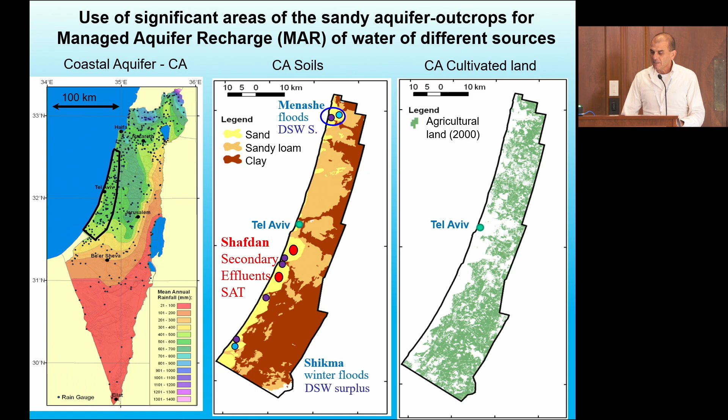Back in the 1960s, it was a waste - the runoff ran very fast to the Mediterranean, and we lost the water from the freshwater storage. Therefore, our clever hydrogeologists back in the 1950s-60s put a dam in a 16-kilometer channel and moved the water to the sands, where it percolates to a good aquifer, and we can store it and use it then.

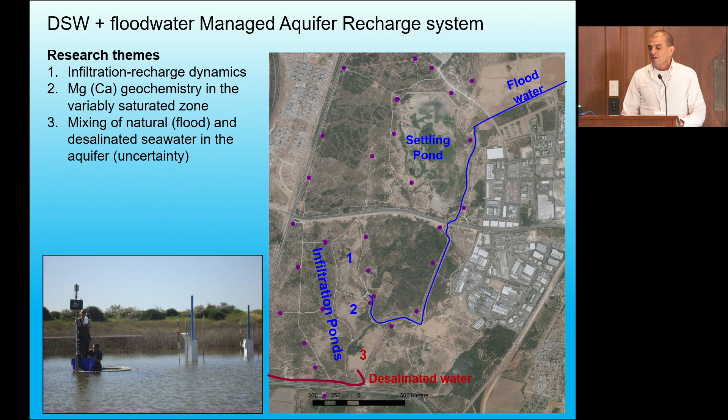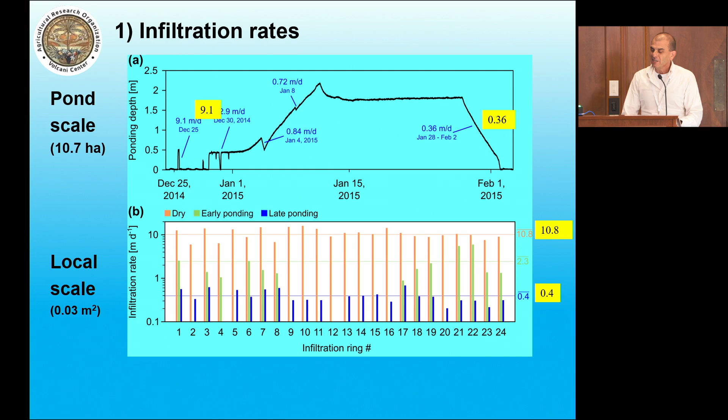We also tried to look at spatial variability, so we had 24 single ring infiltrometers, and luckily the results were pretty much the same. The infiltration rate to the dry pond at the beginning was in the area of 10 meters per day, whereas after a few weeks of ponding it went down to 0.4 meters per day. We usually speak about clogging in these infiltration ponds, but for this high quality, very low turbidity water, that's probably not the case, and we didn't see any evidence for clogging.

What we did find, when we tested the sediment structure, is that these are sandy infiltration ponds, but they also have clay beds down between 4 to 6 meters, as you can see here, whose permeability is much lower. So if you calculate the effective hydraulic conductivity, or saturated hydraulic conductivity, by this harmonic mean, you get rates close to the rates I showed before that we measured. If you assume a unit gradient and Darcy's law, you can easily estimate it, knowing the sediment and having good samples of the sediment.

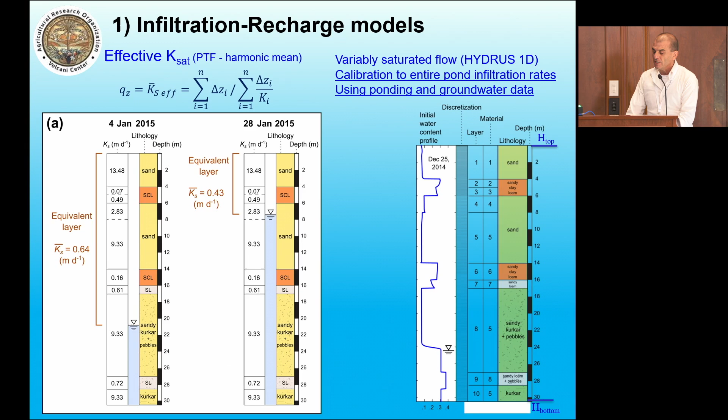To summarize this part: the infiltration rate decreased from 10 to about 0.4 within days of infiltration. Is it surface clogging? No. It's the low permeability layers of the unsaturated zone, and we can estimate the final infiltration rate from the sediment samples. We calibrated a model that will be used in the next chapters. This was published in 2017 in Hydrology and Earth System Sciences.

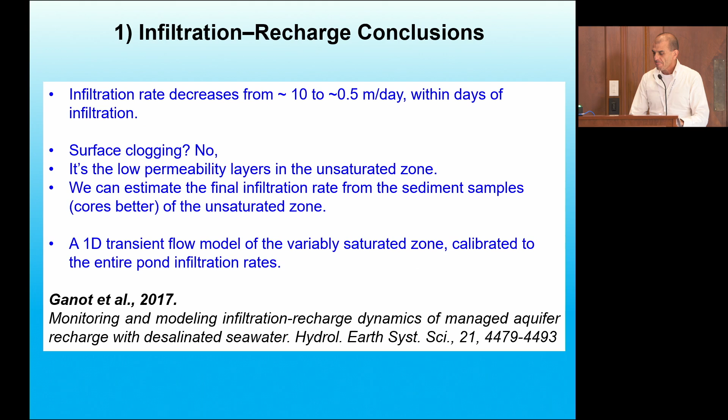So the next thing I'll talk about is the geochemical evolution of the recharging water. When we look at the geochemistry of the system, I'll first look at the sediment, and then I'll talk about the water. On the left you can see the sediment profile. We tested two geochemical aspects.

First, the carbonate content. You can see we have some carbonate in the top sand, and then in the lower sand it goes down - the carbonate is flushed. Deeper, at about 16 meters depth, we get to the calcareous sandstone we call kurkar, which has a high percentage of carbonate.

The gray profile is of the exchangeable cations, the cation exchange capacity of the sediment. The two major exchangeable cations are calcium and magnesium. For most of the profile, exchangeable calcium is about an order of magnitude higher than exchangeable magnesium. So this is for the sediment.

For the water, we divide it into three types here. First, the desalinated water - we call it post-treated desalinated water, meaning the desalinated water is post-treated by dissolving limestone into it. So the major cation is calcium, and the major anion is bicarbonate. Magnesium, as said before, is practically zero - not zero, of course, there's no zero in chemistry, but it's about 0.1 to 0.2 milligrams per liter magnesium.

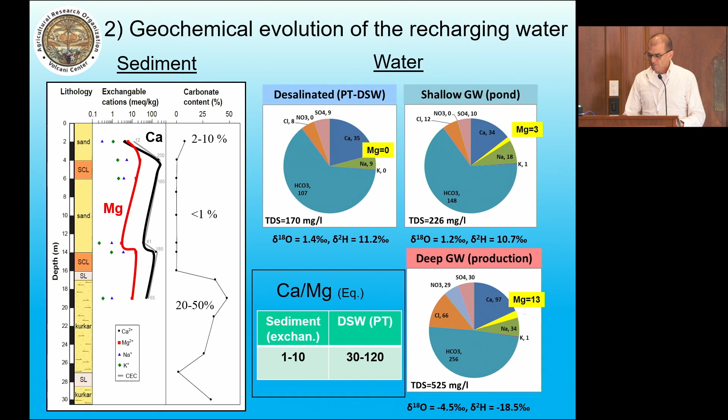Therefore, the direction of the ion exchange will be: calcium goes from the water into the sediment, whereas magnesium desorbs from the sediment into the water. So this is the process we have here.

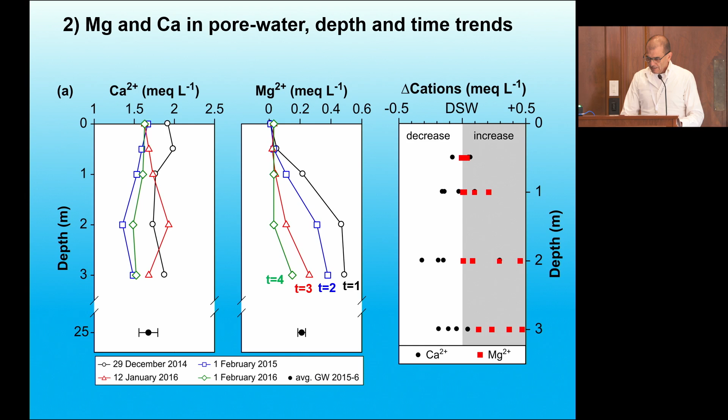If we look at the central panel, this is the top 3 meters results from suction cups we used, where T1 is the first profile and T4 is the latest profile, about a year and a half between them. We see the magnesium is like an ion exchanger - the top 2 meters were exhausted in these 2 years of infiltration of desalinated water. Remember this trend for the next slide.

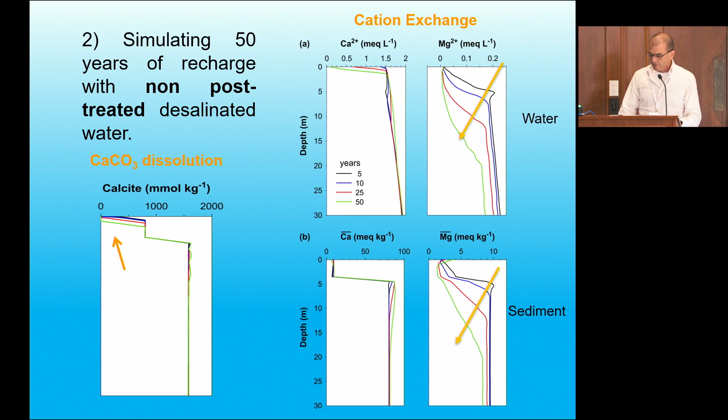So if I summarize these parts: enrichment of non-post-treated desalinated water with calcium and bicarbonate is possible through infiltration. It's cheaper, mostly environmentally, than industrial treatment in a plant, and sustainable for centuries. But the addition of 2 to 3 milligrams per liter magnesium through cation exchange will occur also with non-post-treated calcium. First the calcite will be dissolved and the exchange will happen deeper in the profile. Nevertheless, exchangeable magnesium will be depleted within decades. This was also published in Water Resources Research in 2018.

Now I jumped with calcium and magnesium to another site, the Shafdan, a more famous site. It works already more than 40 years in some parts of it, and it's much more intensive. In the site I showed before, we have about a column of 20 meters of water percolating per year through the infiltration pond. In the Shafdan, which has much more infiltration ponds, it's about 120 meters column of water.

So the history of water supply in Israel is kind of divided before desalination and after desalination. Let's look at the inflow to the Shafdan system before desalination. The calcium level on average was 70 milligrams per liter, whereas after the soil aquifer treatment, the sediment added 30 milligrams per liter.

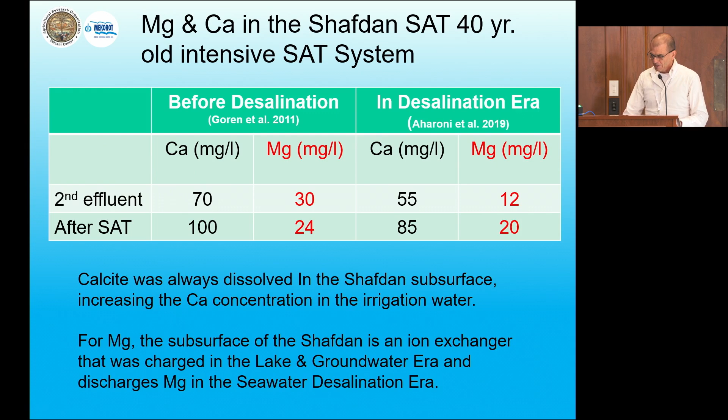So the farmers that use the Shafdan water are happy with that. The magnesium level didn't change dramatically, and it's certainly enough magnesium. They don't have to add magnesium by fertilization. This is an aspect of the Shafdan soil aquifer treatment that we're lucky with, but it works pretty good for us. We charged it as an ion exchanger before the desalination era, and we are now getting the magnesium back in the desalination era.

Now I go back to the site at Menashe, and in the third part of the lecture, I'll try to estimate the mixing of natural and desalinated seawater in the aquifer using stable isotopes. So I remind you the desalinated water goes to pond number 3, the southern pond, while the floodwater goes into the northern ponds 1 and 2.

At the lower left panel, you can see in the bars the amount of water, in the left-hand vertical axis, that was recharged. In red, the desalinated water for the 8 years between 2015 and 2022, and in blue, the runoff water. So as you can see, until 2018, we were in drought. There was very little runoff water, whereas after 2018, we have rainy years, and you see more of the blue bars. This is a monthly discharge. Usually, like in 2017 and 2016, it was only in January, and in 2019, this operation was January, February, March.

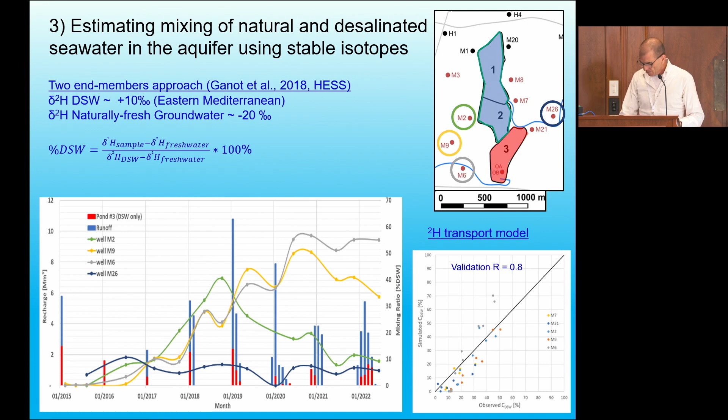So we wanted to investigate how we can predict that percentage, like for knowing how much magnesium—let's say we assume it's non-reactive, so the mix will give us the concentration of magnesium. It's not exactly non-reactive, but in the aquifer it's closely non-reactive. The aquifer adds a little, not like in the unsaturated zone that I showed before.

So every problem like this, when we want to predict, we have some uncertainty, and we have here two types of uncertainty. First, we're dealing with the subsurface—we don't know the aquifer. How is the aquifer composed? We only know it from the wells we drill, but the wells represent a very small volume of the aquifer. So we need to interpolate the type of rock, the hydraulic properties of the rock.

And we can do that using what we do in stochastic hydrology. We can make many realizations of the aquifer and run flow and transport models through these realizations and see the results. The second source of uncertainty is climatic, as you see it's very variable—the amount of water available through the ephemeral flows.

So we could also fit the histogram—actually the same histogram, but now in larger bins here—and we can fit a probability density function. This is a gamma probability, and we make many realizations of the future available water through the runoff system.

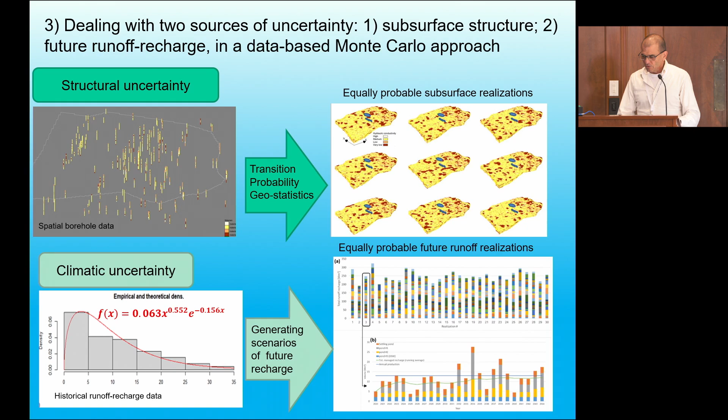And so we wanted to predict here. Just a minute, okay. So we handled these numerical experiments. We had 4 ensembles of 30 realizations each. I'll concentrate only on two, the green ensemble and the blue ensemble. In the green ensemble, we put 30 realizations of the aquifer. All realizations fit the data from the boreholes, fit the statistics, and fit the spatial statistics, but they're still different.

And we said the future available water is deterministic—so we have one scenario of the future available water. While the blue ensemble is the opposite: we have a single realization of the aquifer, we say we know the aquifer deterministically, but we don't know the future climate and the availability of runoff water. So we have 30 realizations, each of 25 years, of available runoff for managed aquifer recharge.

So what you see in these panels in the center, let's look at the center one. It's well M9, a yellow well down in the left here, you can see. And let's look at the ensemble.

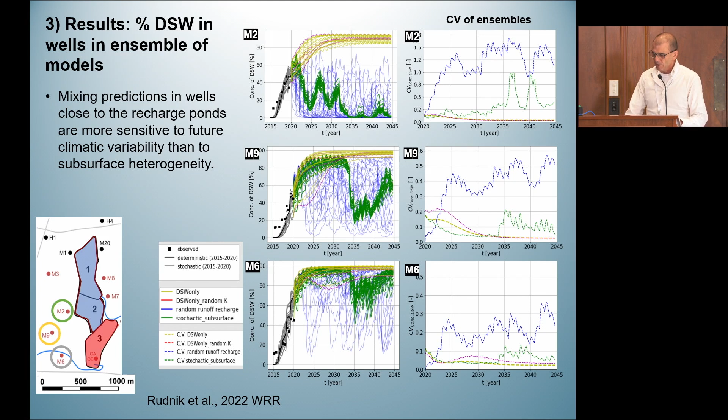The blue ensemble shows the percentage of desalinated water for every time we have results of the realizations. As you can see, it's very variable, and the envelope of results is very large, much larger than the green ensemble, which is the structural uncertainty. So the climatic uncertainty is much larger in this system. In the right-hand panel, this is the coefficient of variation of these 30 curves. As you can see, the blue coefficient of variation is always higher than the green coefficient of variation.

So I'll summarize this chapter. If the largest source of water is climate dependent, the climatic uncertainty prevails over the structural uncertainty for mixing predictions in wells close to the managed aquifer recharge.

The next conclusion, I didn't show it, but it's in the paper in Water Resources Research 2022: the uncertainty in mixing derived by climate variability decreases with distance from the recharge location, whereas the structural uncertainty is stable with increasing distance. That means if I take wells not closest to the infiltration ponds, but wells down gradient 2 kilometers, the blue ensemble envelope gets smaller, where the green stays the same. So the structural uncertainty relatively will grow.

And that's it. Thank you.

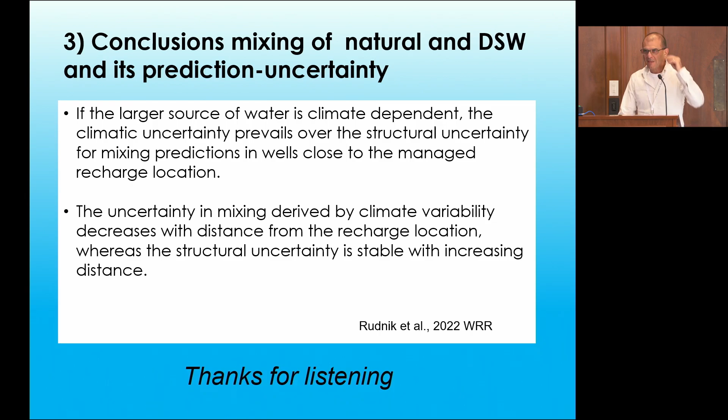I don't get a laser to point.

Hi, I'm Aaron Wilson, I'm with Idaho National Laboratory. Thanks Manny for the introduction. It's really cool to go after Daniel.

I'm also going to be talking about something a little different, using solvent-driven processes to recover minerals, from more of a critical materials perspective. I'm a researcher with the Critical Materials Institute, which is a DOE hub. Their meeting actually starts tomorrow, and I'll be sticking around here and showing up there late. I'm also the center lead for something called METALLIC, which is a DOE infrastructure investment of $75 million into developing kind of a user facility for critical materials research, that's just getting kicked off now.

There's a good chance you've never heard of Idaho National Lab. We're a bit of a secret. We used to be a plot of land about the size of Rhode Island with a bunch of cinder cones, owned by the Navy, who would take guns for ships in the Pacific out to Idaho, retrofit them, and shoot them at the old volcano cinder cones to sight them. When they decided to start building reactors, they said, well, we did one near Chicago in the squash court, maybe we shouldn't keep doing that. So they moved the reactor construction out to Idaho, and we've had more than 50 reactors on site.

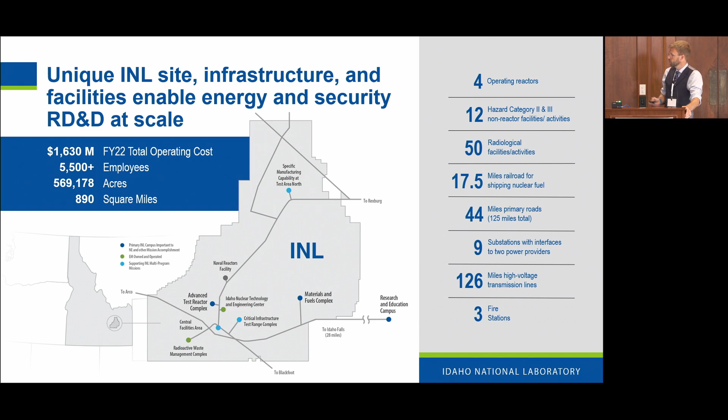Fun place to work. Right now, we're kind of in the midst of transitioning from a global society run off of fossil infrastructure to one that is going to be run through critical materials. This is a big transition. We're going to be collecting, storing, and utilizing all our energy basically through materials, whether it's a reactor, a solar panel, or a wind turbine.

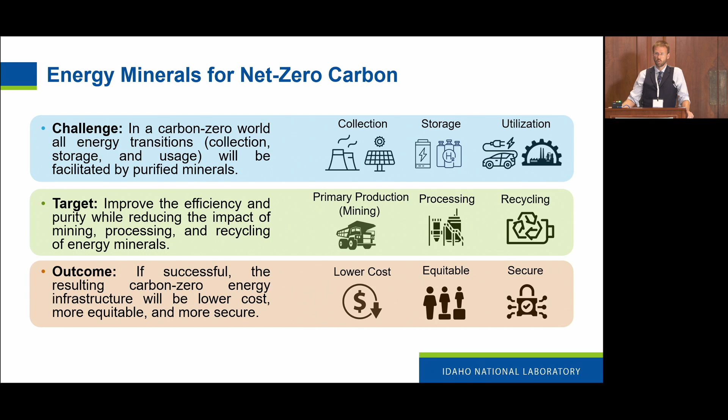This is hard rock materials, not coal, not oil, not gas. So we need to improve how we get those materials, both from primary source, how we process them, how we recycle them. Ultimately, for people, this is going to be lower cost. Just shooting from the hip, cars are going to cost half as much, and it's going to cost a quarter as much as it does now to power them. This is going to be a huge savings for the consumer.

So a quick tutorial on what it takes to mine. It's really the same whether you start from ore or secondary recycled material, e-waste, like hard drives, car batteries. You collect it, you crush it, and then you physically separate it, because each little tiny bit of rock will have more ore or less ore than another.

Then you go from those solid-solid separations to solid-liquid. That's leaching. Leaching's done in many different ways. It's not just throwing acid at it. Sometimes it's throwing acid and peroxide at it. Or you smelt it and get it into a liquid that way.

Then you hit liquid-liquid separations, and that's what a lot of us here are very, very familiar with. You have a liquid rich in one thing, and you want to separate it into either pure water or do selective separations. And then you ultimately need to take that liquid and get solids out of it if you're going after the material, the minerals and whatnot.

And that can be electrowinning directly to metal from aqueous solutions, such as copper. That's where a lot of our copper comes from. It might be smelted, but then it's electrowon. It's put back into an aqueous solution, pulled through the aqueous solution, and then reduced back to metal to get the purity we need to actually do electronics.

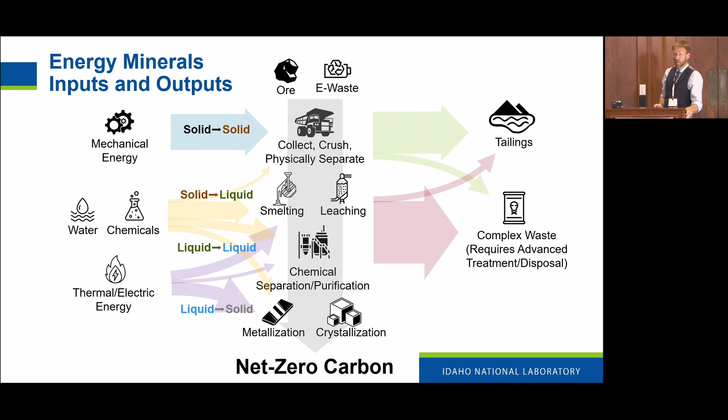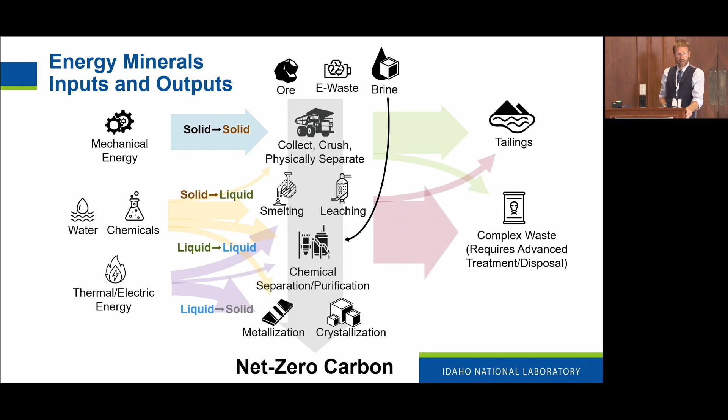Anyways, in these processes, we put in mechanical energy, we put in water and chemicals, as well as thermal and electric energy. And out of this comes tailings, as well as some really complex wastes. Brines, if we go for brines, can bypass a lot of this. Like the Red Dog mine up in Alaska is the biggest waste generator in the United States. And that's because once they pull something out of the ground, you've got a lot of rock that's now just waste.

So there's all these processing steps that have real water management issues with them. And if the water management issues are not addressed, there can be terrible, terrible, terrible outcomes. That's $15 billion Brazilian, actually. But this is important. That's 43 million cubic meters of tailings that killed 19 people. And the Brazilian government just levied, that's 15 billion Australian, because Australians report on it, which is equivalent to 9.7 billion in US dollars. But the cost to treat that water would have been $500 million.

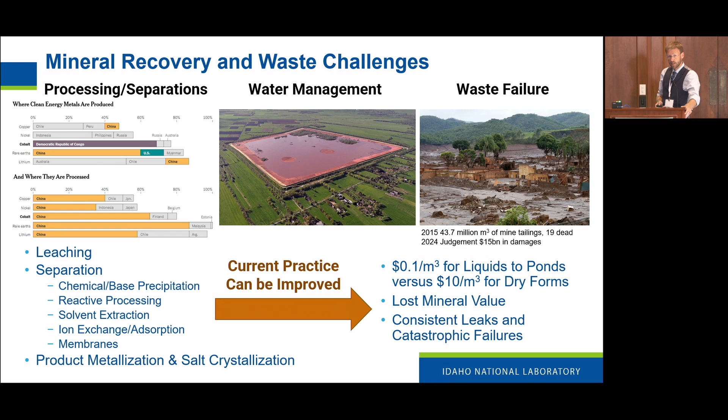So they didn't do it dry, and by treat it I mean dry storage, take it from a tailing to dry storage, because it costs about 10 cents to throw this stuff into a tailings pond, whereas $10 to go to dry form storage. And right now a filter press is the general technology to at least partially treat it. But this is a place for innovation.

And this is a big issue. These slurry ponds are problems everywhere. About every 2 years or so, based off of what I can find, there's a major slurry pond failure. And this is not like rogue operators. These are the majors. These are the most significant mining companies out there, the BHPs, the Glencores, the Vales, the Rio Tintos, the various ones.

And I mean, they're all the ones I have stuff up here for variety. So I have another iron ore failure up at the top. I have red mud, which is bauxite residue, which is more midstream processing. Then you have coal fines, which is soft rocks. That's actually the largest volume. And then you have fly ash. And the significance of the coal fines and fly ash is those are both U.S. based, whereas we've pushed most of our other mining offshore.

This is a big deal, though. And it'd be one thing if research was being done on this, but this is research for a range of communities. You see pharmaceuticals are putting a lot of their revenue into research, as semiconductor software, and I mean, just the S&P companies in general. But mining is currently at less than 1% of their revenue going into research. It's just not happening. There's just not progress being made. And I think this is worth acknowledging. When I found this out, it was shocking.

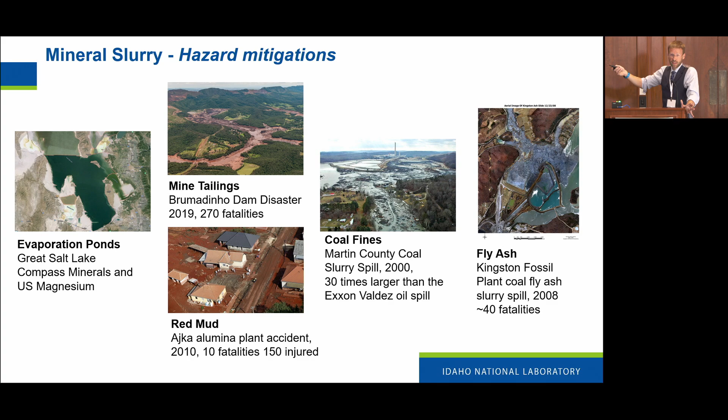One thing I wanted to hit on was this issue. Megan talked about climate change. This is a huge climate change issue because these are designed with an expectation of how the climate's going to be, and if that's valid, it's anyone's guess. Based off what it looks like, there might be greater risk in the future.

We're closing in on basically where we can't get better at desalination. And so I'm not the only one pointing at this, but maybe we try to stop thinking about this as an infrastructure cost to manage. That's not the right way to think about it. Maybe we can transform this into a revenue generating space - a mineral resource and processing industry.

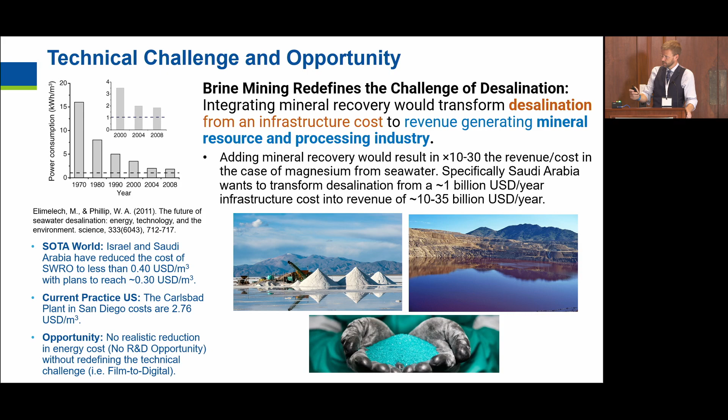This has too many words on it, so I'll just keep talking. We have lithium - this is the Berkeley pit in Butte, Montana - and that's just some nickel sulfate. What this actually looks like in real terms: I use Carlsbad as a volumetric proxy. So 140 million cubic meters of seawater coming in, 70 million cubic meters of water per year. It requires 30 megawatts, which is really not that much electricity. I work at the Nuclear Energy Laboratory - this drives the guys who make nuclear power plants nuts. They want something that sucks a lot of electricity, which is part of the reason I have the second line down there.

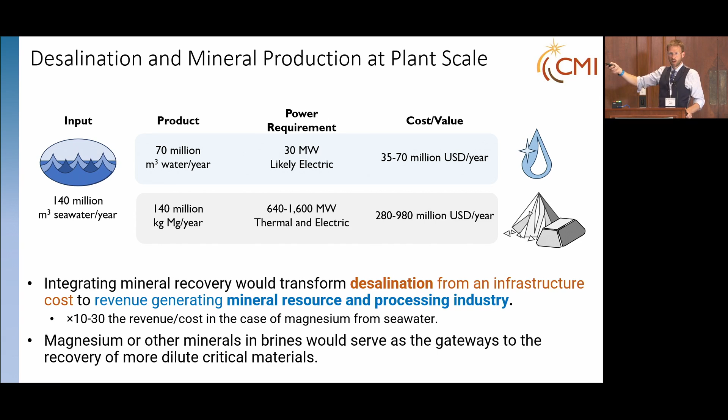So if we go to the point where basically there's a kilogram of magnesium in every ton of seawater, rule of thumb, there's 140 million kilograms of magnesium in that. Now if we take that all the way to metal, you're using at least 20 times the energy. We can do all sorts of things on exergy and thermal versus electrical, but you're going from a cost of about $35 to $70 million a year using the cutting edge, state-of-the-art 30 cents per ton seawater desalination, to something where you're generating revenue on the order of $300 million to $1 billion a year. And it doesn't have to make that much money - it just can't cost anything. So the water becomes a byproduct of something we all need: a structural material, a replacement for aluminum and iron.

Just to sing the praises of magnesium: it's 33% lighter than aluminum, and it's easier to recycle than aluminum by 50%. Carbon fiber, I like to remind people, requires low-paid people to put it together because it's a labor-intensive layup given current technology, which is why we haven't seen it replace huge swaths of structural material - you have to have people to do it.

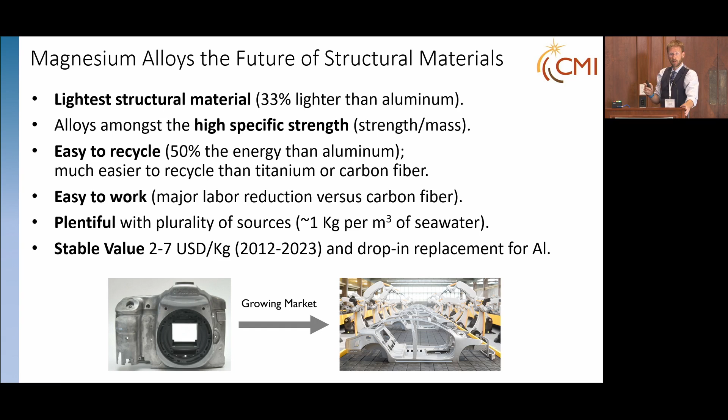It comes from many sources - ocean is just one of them - and the value of it has been stable over the last 10 years. $2 to $7, probably favoring the lower end to be realistic, but the aluminum to magnesium ratio is a real economic factor, and it can ship anywhere you want to ship it. If you go to Home Depot, the premium tools will all be magnesium house tools. So there's again a rise in magnesium use. But again, there's a story here.

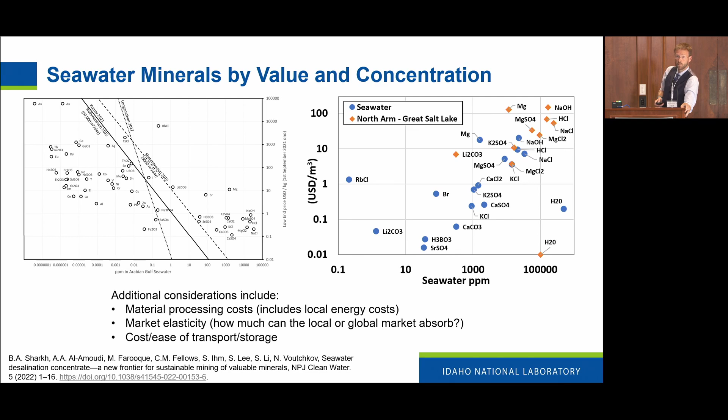But magnesium is the next one there. Magnesium can go any place. You can ship it around the world, and the market can absorb all the desal magnesium that's out there right now.

And once you've pulled the magnesium out, then you can start looking at other things. You're going to have concentrates and byproduct streams. You could have a potential 10K enhancement after desal and magnesium recovery, where you could really start looking at the uranium in the seawater, or mine the gold in the ocean, which we've all heard about so many times.

But this plays into a mining truism that grade is king. The real value of any activity is going after the highest grade ore you can, and that person who does that is going to make the most money. Separations are largely irrelevant because we all have the same ones, which runs counter to a lot of what we hear from the water treatment folks, where we're going after extremely dilute sources. In my mind, we should look for active recovery and sequential recoveries, where we grab a high value.

I'm working with the people in Butte, Montana. People want them to go after the rare earths in the Berkeley pit, but they're like, we're going to have to hit the zinc in this first to make it profitable. Then we can consider the rare earths, and we need to listen to them.

You work down the sequence of value. In China, they actually mandate that if you dig it out of the ground, you have to pull the gallium out of the aluminum bauxite. We don't do that. But since it's mandated there, it's dropped the value out of the market, and they're the only ones to produce it. So it destroyed the rest of the market in the process.

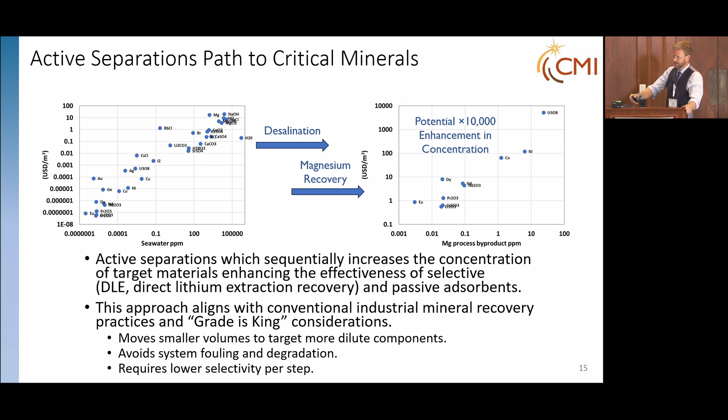Okay, let's see. There we go. So we've actually seen a figure a lot like this already once or twice, but where I'm working is basically here.

So NF, I always thought NF was a damaged, expensive RO membrane. That's what it is. But we're to the point where we're really seeing it hit commercial application in a few places. It's replacing UF in a few places. What that gives you is a divalent stream and a monovalent stream, or something close to it. That's something I can really work with.

I've got a technology where solvents induce precipitation of solids out. That's the DME, dimethyl ether fractional crystallization. So I don't need to evaporate that to get to the solids. I can just do my thing, and the solids come straight out of solution. I'll show a little bit about that.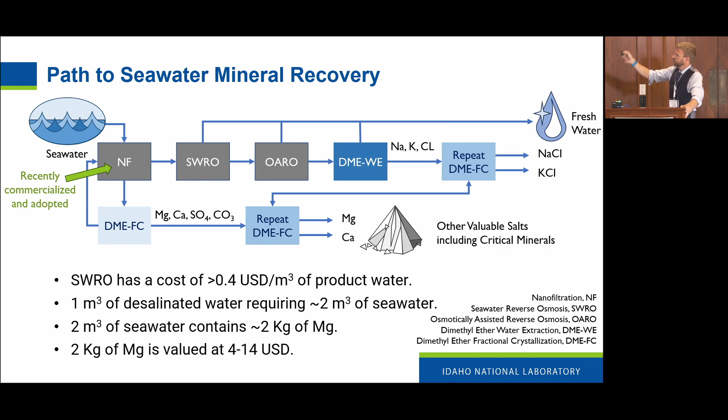But then across the top, you can imagine you've got seawater RO, you've got osmotically assisted reverse osmosis, or you could have high pressure, you could do both. And then I've got a technology called DME water extraction, which is a zero liquid discharge process. But this basically lets you get to the minerals in this water, with seawater or some other water. We're working on these technologies yet.

And so I'm working on a solid liquid separation. The most established technologies, the real technologies in this space, are evaporative crystallization, which is massively inefficient. Shihong put up some good data on this. You have chemical precipitation, which is actually a fabulous technology. Lime softening is amazing, and in many hydrometallurgical pathways, these chemical precipitants are actually recycled in the system, which is fabulous as well. We should stick with those guys.

But oftentimes, you end up with a brine waste product if you do it that way. What we're aiming to do is a cycle, a chemical trigger, and get solids out in a depleted solution, at less than... 95% energy savings, with no chemical consumption and no increase in the waste.

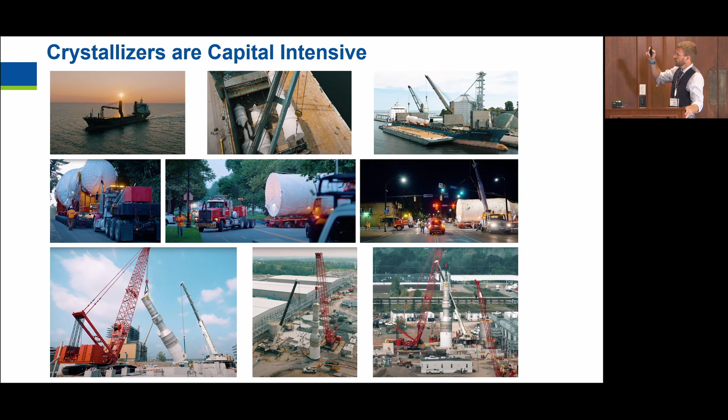costly to operate. So what we have is dimethyl ether-driven water extraction. So if we take a 15:1 ratio in mass DME to water, the water will go into the DME, and you'll end up with dry solids.

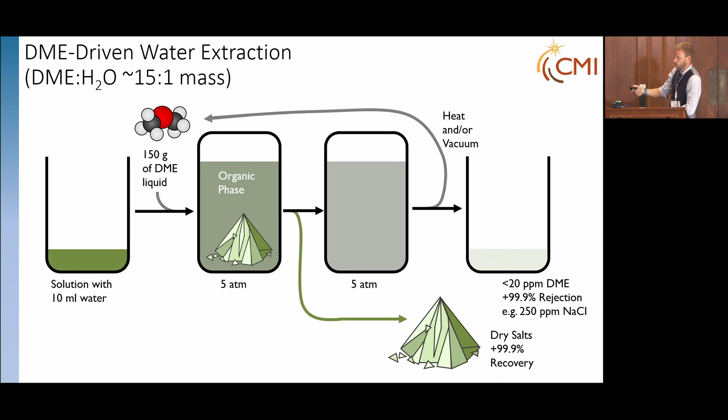If you do this with sodium chloride, you end up with about 250 parts per million sodium chloride in the final product—that's less than Gatorade. Just as a reference point, you end up with 20 parts per million DME. DME is approved for food processing in both the US and Europe, and it's not a greenhouse gas.

It decomposes very rapidly in the environment, and it's classified as a peroxide former, but all experiments point to the fact that it doesn't actually form peroxides. It's just an ether, so it gets cataloged in that group. Anyways, I worked with John Lienhard and Zi Hao Foo, and they did some calculations, and it looks like we could go to ZLD for the cost of MED.

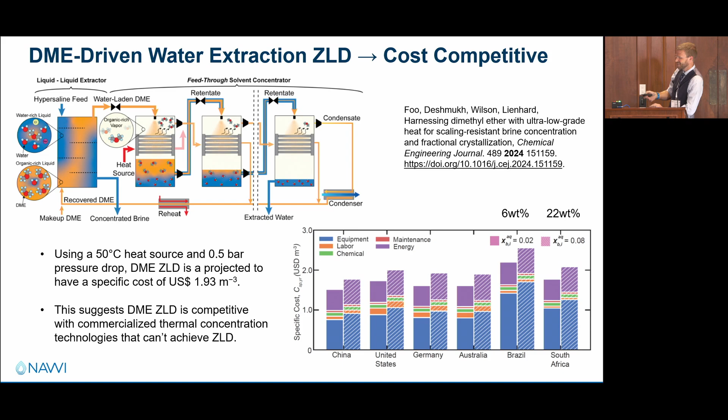We could actually do half an equivalent of DME for one equivalent of water and drive things out of solution. That's because when you put an organic in an aqueous, things precipitate out. How much precipitates out varies a lot. We get between 12 and 99% recovery, which could be 3 to 70 grams per 100 mils of solution. This is a purification step done correctly. We get separation factors anywhere from 1, which is no separation, up to 700, which is a good separation.

These are some quick examples. Top left is a 4-centimeter cobalt sulfate crystal from a recycled cobalt samarium magnet. Then you have industrial nickel sulfate from battery recycling—it says greater than 70%, but we actually get 95% recovery. You've got some neodymium crystals there too.

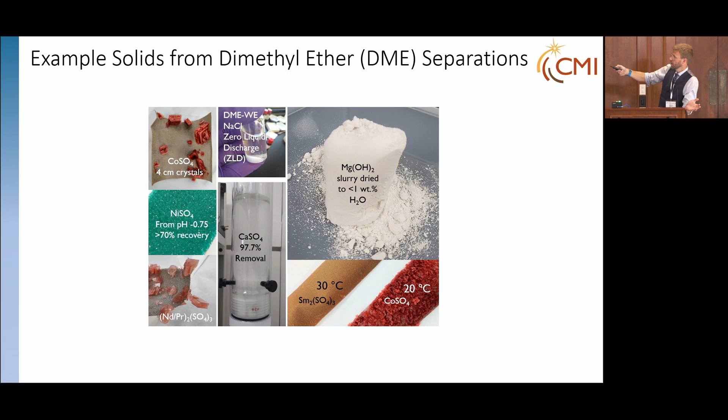You've got calcium sulfate softening, basically. You've got ZLD—I don't think I get into it, but we can change the temperature of our system and go from 99.5% lanthanide sulfates to 99.5% transition metal sulfates. Really cool, you can't do that with evaporation. That's the sodium-potassium separation, but this just works well. And we can dry solids, which is kind of what I was talking about first.

Okay, I have a moment. So this gets into the historic connection between water and energy. Alcoa planted the largest aluminum factory in the world in the Tennessee Valley Authority during World War II because of the water and the associated energy. Oak Ridge got put there as well for the exact same reason. Oak Ridge eventually led to nuclear power, and then we ended up having a nuclear power plant in the Tennessee Valley. This is, as the DOE, something I like to highlight for a lot of our sponsors—this is the water energy nexus, it exists in multiple ways.

And then I also want to highlight—I don't know how to pronounce his name correctly because I've read his name a million times, but I'm one of those people that's just read his name—Zeev Alfassi. He's a researcher at Ben Gurion University, in the nuclear engineering department. He was interested in separating various salts for nuclear applications.

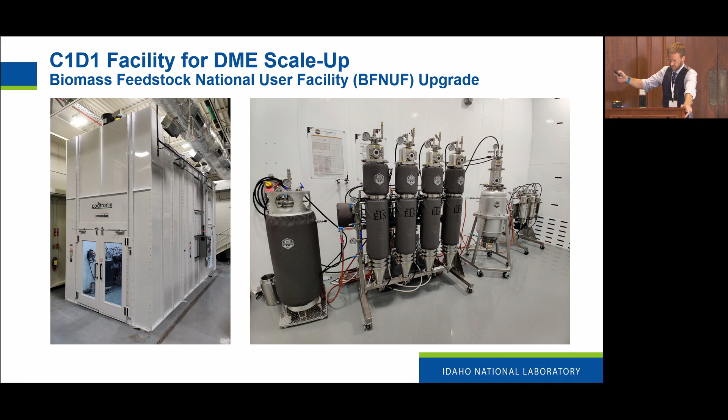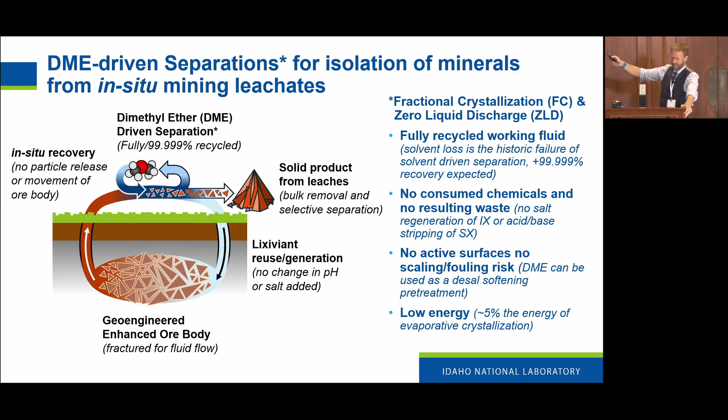We're building up to larger scales. And I don't have a conclusion slide, but this is the vision: we pump lixiviant into the ground to leach out material, we pump a solution up for in situ / solution mining, and then we do a process that doesn't change the salinity of the water to get the minerals out. And this applies to a lot of things.

I think this community is very familiar with brine. We all know it as a waste stream from a lot of industrial processes, for example desalination plants, the mining industry, gas and oil drilling, and power plants. And we all know that brine disposal can be problematic because it causes a lot of environmental concerns, and therefore it can be very costly to manage.

At the same time, we all know brine treatment is expensive too. Tong and Elimelech have this nice paper from a few years ago where they did an analysis of zero liquid discharge and explained why brine treatment is so expensive—largely due to the high salinity in this waste brine. If you look at this graph, it clearly shows the specific energy for water recovery from different sources of water as a function of salinity.

You can see that RO is actually down here in this graph. The energy intensity of RO desalination for seawater is mostly in the 3 to 5 kilowatt-hour per cubic meter range. But when the salinity increases, the energy intensity also increases accordingly. And we are currently lacking a technology that can really allow us to treat brine with higher salinity than twice seawater, which is the 70,000 ppm listed in this graph.

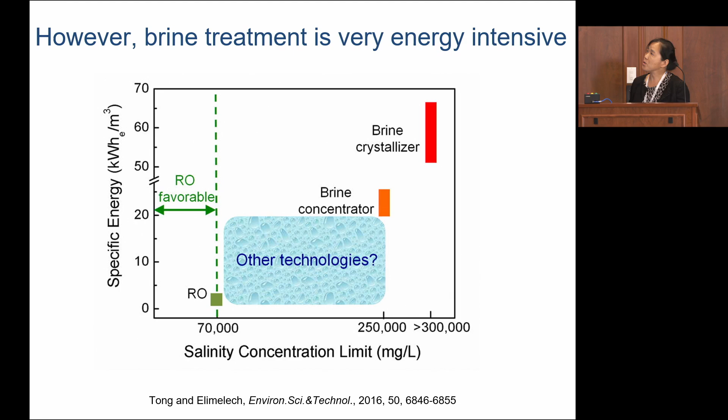So how do we do it? But before we start talking about specific technologies, I want to show this brine from another, more beautiful side. We all have natural brine lakes, and people are interested in these lakes not just because of the beautiful color—they show different colors because of the speciation of minerals in the water, their concentration, and in some cases the microorganisms growing in that water.

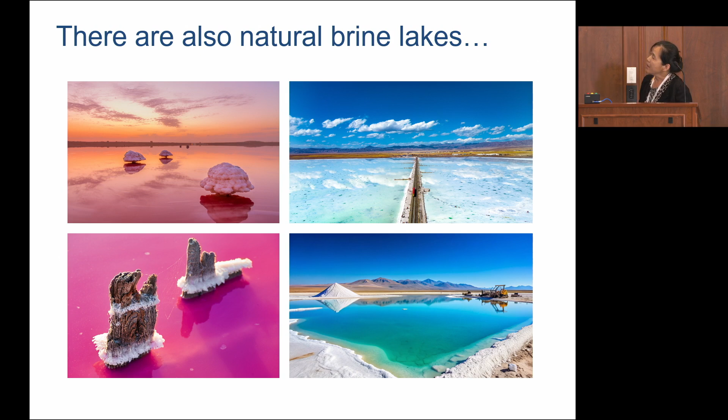People are interested in these brine lakes because there are a lot of critical minerals we could potentially produce from this brine water. For example, people have been looking at producing critical minerals such as lithium, magnesium, nitrate, and also the examples you saw from Aaron's talk earlier. In many of these practical processes, people currently use a process called solar evaporation ponds.

Those are the pictures of the ponds you see here—of course, this is an AI-generated picture, not a real one. But basically, people use this solar evaporation pond to evaporate water, to concentrate the minerals to a point where we can economically precipitate the chemicals out or use other treatment to produce the mineral.

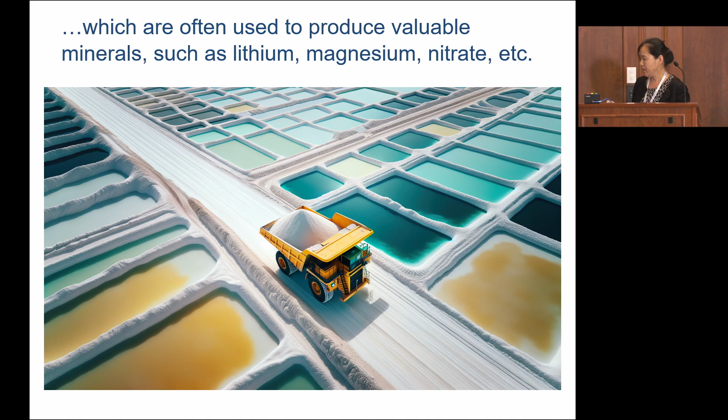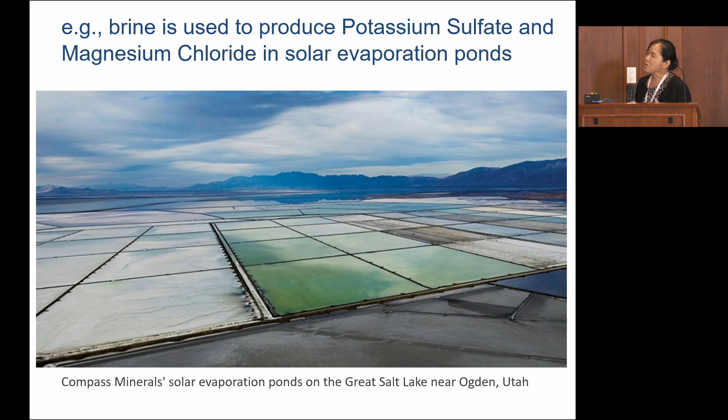So this again is not a real picture, but there are real pictures out there, and if you're traveling by airplane it's not hard to find views like this one. This is an example of a solar evaporation pond at the Great Salt Lake in Utah. The company Compass Minerals uses these solar evaporation ponds to produce potassium sulfate and magnesium chloride, and recently the company mentioned they also have a reasonable concentration of lithium in these ponds, so they're looking to recover lithium from this water as well.

At the same time, here is a real picture of lithium fields in Chile. These solar evaporation ponds are operated by the leading mining company SQM, who produce lithium from their brine. As the water evaporates away, lithium concentration increases, and you can see the beautiful color change from turquoise to yellow. However, this natural process they're using is very, very slow—the solar evaporation ponds take almost 1.5 years to reach a concentration high enough for subsequent recovery of lithium from the water.

So it's an extremely slow process. And that's what leads to the technology I want to discuss today: interfacial solar evaporation, and how it could possibly allow us to significantly accelerate this process and make it more economical.

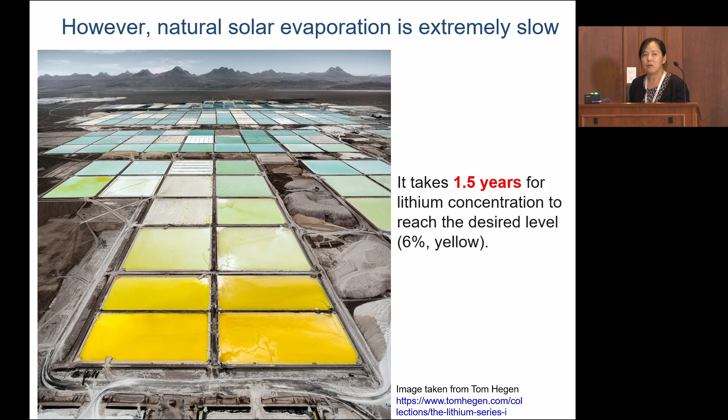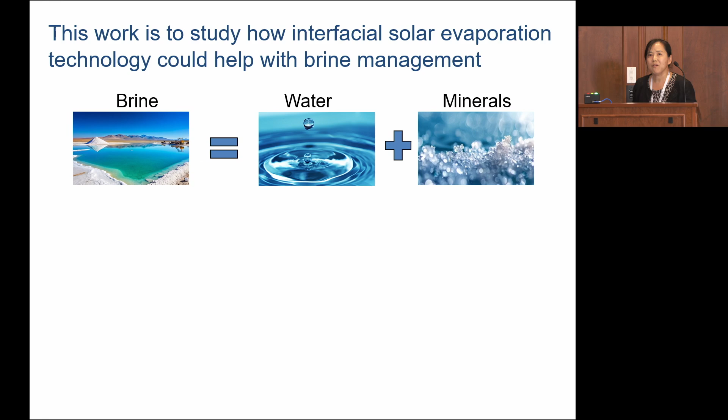When Aaron talked about the hazardous effects, the flooding, and other negative aspects of solar evaporation ponds, by shrinking the timelines of this process, maybe we can control it a lot better. By no means am I presenting a mature or good enough technology for now, but I want to use this as an opportunity to discuss how we could re-examine brine treatment by integrating water recovery and mineral recovery aspects, so that instead of always treating brine as a waste stream and a highly energy intensive process, we can look at it in a more positive light and potentially recover some valuable products.

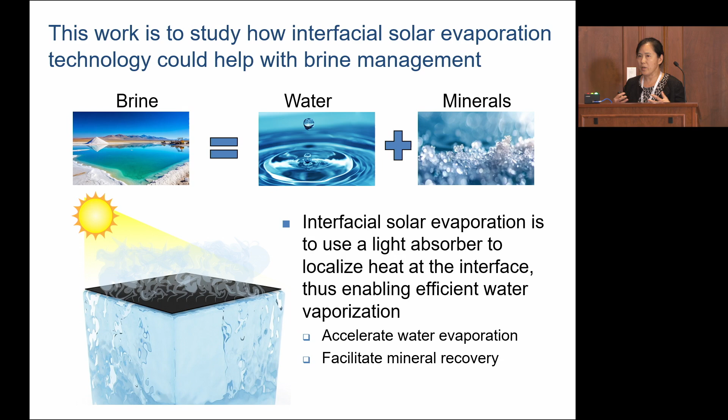The technology I want to introduce today is called interfacial solar evaporation. It uses a solid light absorber that absorbs sunlight, generates heat, and localizes that heat at the very interface where water evaporates. In this talk, I want to discuss how interfacial solar evaporation could potentially accelerate the water evaporation rate, and also how we might engineer the material used for solar evaporation to enable mineral recovery. That's the goal of my discussion today.

Interfacial solar evaporation is not a totally new process. People have been studying it since about 10 years ago. I arbitrarily attribute its evolvement into 3 stages. The first generation started when material scientists discovered plasmonic nanoparticles that can absorb light and convert it to heat, observing faster vapor generation from the particle surface. From there, people looked into other morphologies and materials.

I consider the second generation of this technology to be when people used materials to make a membrane - a porous material where water can be transported up and evaporate from the membrane surface, with salt crystals accumulating on the surface. These are two-dimensional films that allow interfacial solar evaporation to take place. More recently, researchers have been looking into three-dimensional designs, which have some advantages I'm going to show you soon. That's a little bit of history.

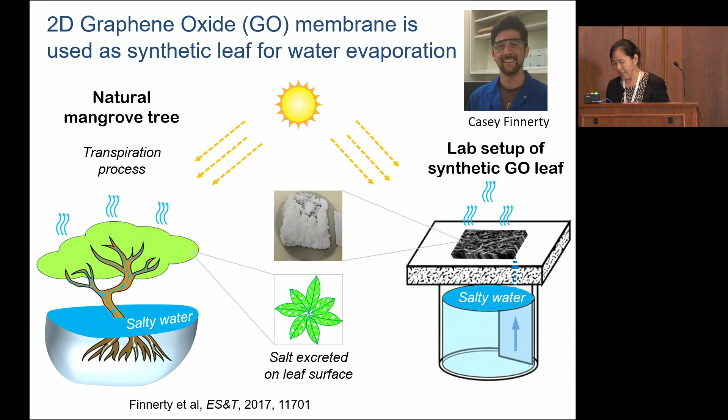We are trying to mimic this process, so we synthesize this membrane-like material. It's porous, and we use it as the interfacial solar evaporator with a water transporter to suck water by capillary force and lift it to the membrane to supply the water needed for evaporation. This is a picture of the structure of the 2D graphene oxide leaf - you can see it's very porous, just like a microfiltration membrane. Because the graphene oxide is dark, black, it can absorb natural and solar light very efficiently, and these porous surfaces provide high surface area for evaporation.

That's the material, and here is the water evaporation rate. As I mentioned earlier, our goal is to use this to accelerate water evaporation. You can see that when we have this tree structure - the GO leaf separated from the bulk water - it can really enhance the water evaporation rate compared to natural solar evaporation.

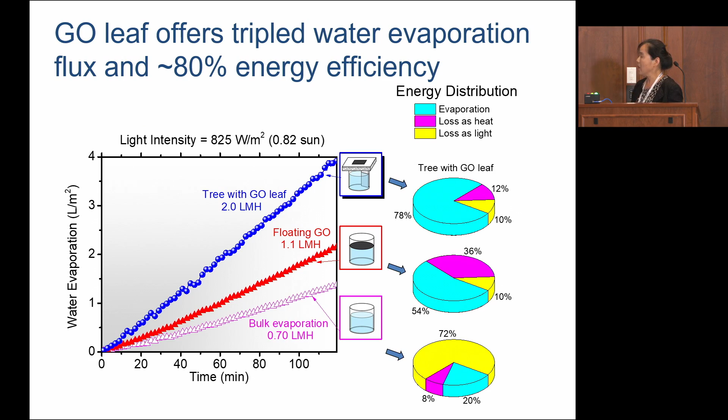Another important step I want to mention is the separation between the evaporative surface and the bulk water, because this separation is actually very critical - it minimizes heat loss through the bulk water. If we compare this lifted structure versus one that's just floating on the surface, you can see almost a double enhancement of the water evaporation rate. That's because of the separation of the evaporative surface and the bulk water. So that's one critical factor.

And of course, we also looked at other kinds of materials to do this job. This is another study done a few years ago by Linlin, who was a visiting student in our lab. She synthesized this reduced graphene oxide coated on nanofibrous hydrogel. And this material can work even better than the graphene oxide film that I talked about earlier. So this is a very interesting material.

If you look at the dry material, it's white. But then once you put it in water, in contact with water, it absorbs water very fast, and then it becomes black. And then it absorbs sunlight and allows this solar evaporation to take place very efficiently. So when she compared this performance with other studies at that time, this was one of the best performing materials at that time. But this is by no means the best material out there.

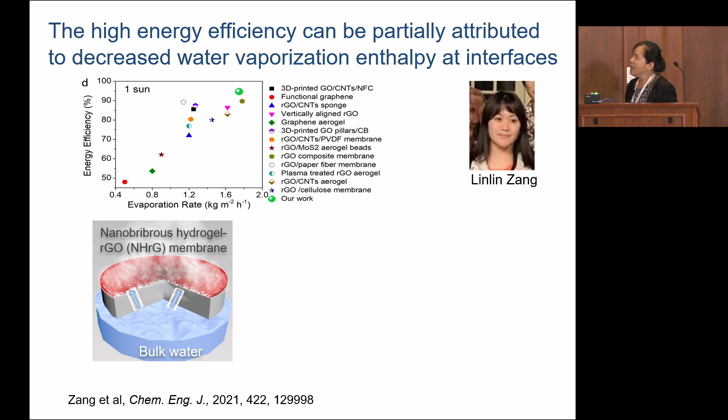My point is actually different. So we also looked into the water evaporation mechanisms to see why this interfacial solar evaporation is much more effective than natural water evaporation or evaporation from bulk water. So we actually used a combination of DSC and TGA to measure the evaporation enthalpy for the water evaporation from the membrane versus the bulk water.

So for bulk water evaporation, it has a value of 2,300 joules per gram. But if you look at the enthalpy for the evaporation from this material, it actually becomes a lot lower. Our hypothesis here is that because we are allowing this water to really evaporate from a nanochanneled surface, the material really interrupts the hydrogen bonding between water molecules. So we think it's easier for the water to leave the surface as water clusters instead of single molecules. And that's probably why we observe this lower enthalpy value for evaporation from the surface.

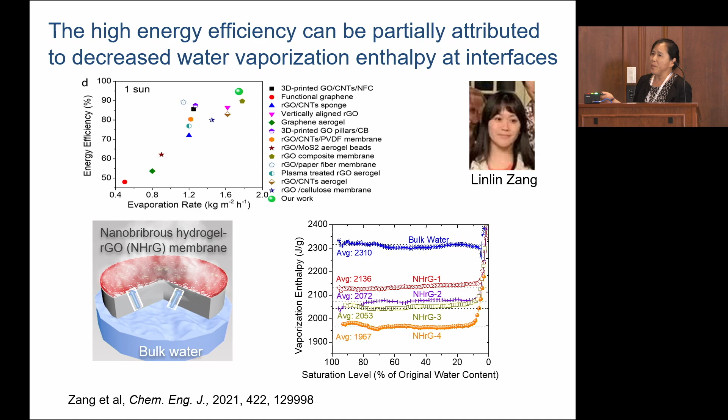But with this data, my point here is really to say that the material itself doesn't matter that much. As long as you can produce a macroporous structure that is black and efficient to absorb sunlight, you can basically observe a very fast evaporation rate. So that means there are a bunch of materials and a lot of studies on this, and they all work pretty well.

However, I do want to go on to start talking about some other, maybe more engineering aspects of this process to make it work even more efficiently. So we all know our target is to use solar light, and we know the sun actually moves from morning to noon to evening, so we have this directional change. So it's not hard to imagine that if we have a flat surface, the effectiveness of collecting the solar light would not be as effective as a surface that is more vertical or omnidirectional. So that's the motivation why we want to design a three-dimensional structure to do this job.

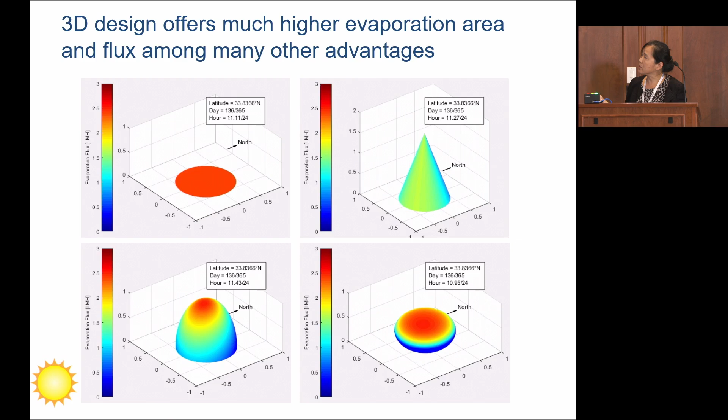And of course, there were studies already using a lot of different three-dimensional structures. There are cones, there are cups, there are even mushroom structures, blocks. So people are studying all kinds of three-dimensional structures for solar evaporation. And we tried to see what morphology or shape we want to use.

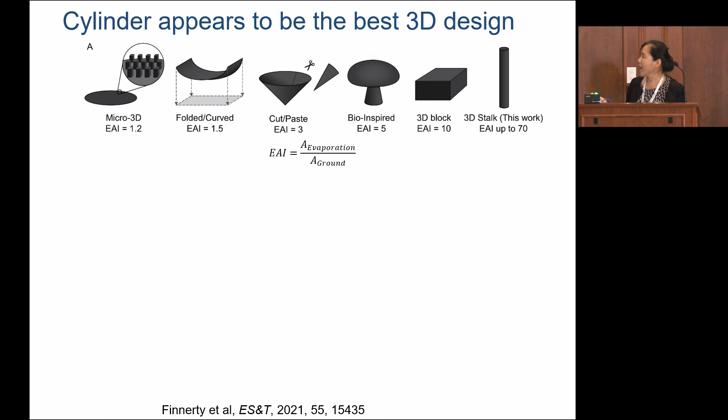Because another important factor in this consideration is to look at the lifting rate. When we have a three-dimensional structure, we need to lift the water up to a certain height. So the lifting capability of the structure will also limit the evaporation flux. So it's kind of a balance between the water lifting capability of the structure and the amount of surface area that you can get from the structure.

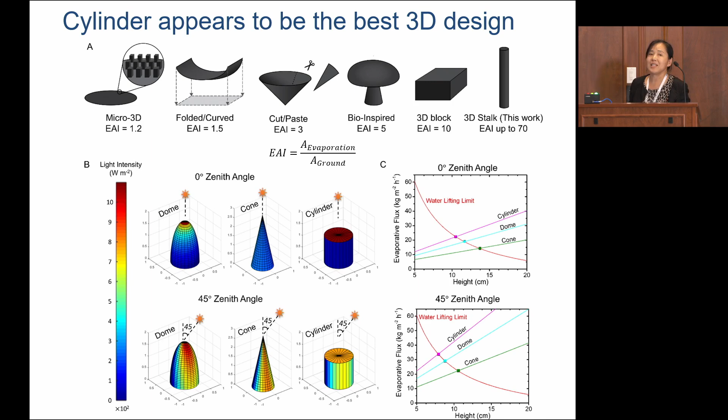That's an optimization process that Casey went through, and he determined that the best structure among those he studied is this cylindrical structure. So that's how we synthesized this, what we call the 3D stalk, for the study to compare it with the two-dimensional GO leaf that I mentioned earlier.

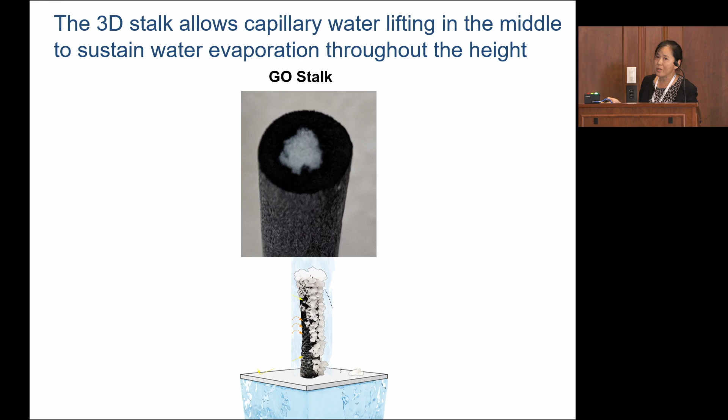This material is really, again, very simple to synthesize. We just use a cotton stalk, and then we coat the same graphene oxide polymer mixture on the stalk. You can see here from the picture, in the middle is still uncoated cotton material. This is to keep the channel in the middle open so that water can be lifted from the middle. And then the outside is coated with this graphene oxide polymer material for effective evaporation. So that's the material that we use.

And first of all, I want to show how this evaporation flux that you get from this three-dimensional structure could be a lot faster than this two-dimensional material.

So of course, it also depends on the height that we use. The EAI is basically the evaporation area versus the projective area. Of course, the taller the stalk is, the more evaporative area you get, and the higher the flux, which could be a lot higher than the two-dimensional material.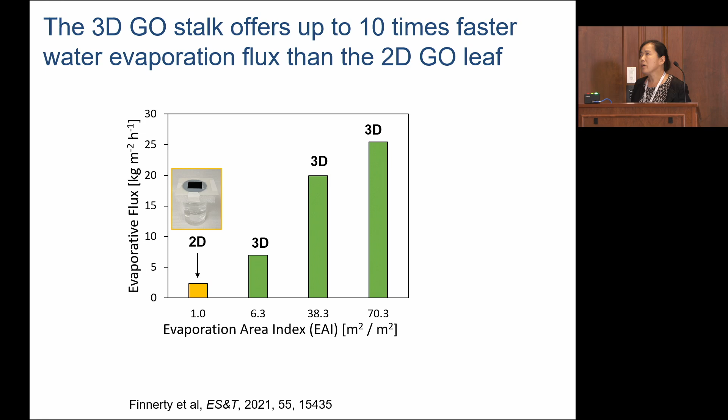But this is not the only benefit. When we really examine the different conditions we use during the evaporation process, we found some additional benefits. Of course, the response to light is one kind, and that's the original motivation.

We found that with this three-dimensional structure, especially if you look at the zenith angle—meaning the angle where the sun has moved away from the noon, vertical position—the water flux actually increases when the sun moves toward evening or away from noon, because of the effective collection of solar light as the sun moves. So it's just a higher evaporative area.

We also looked at wind speed and how it affects the evaporation rate. When wind speed increases, the two-dimensional membrane's evaporation flux increases only slightly, but we see much more dramatic effects with the 3D structure. That's because the 3D structure creates more evaporation from the surface.

But the most important benefit of this 3D structure is shown here. We all know that for people who study evaporation, increasing salt concentration decreases the evaporation rate from a natural water surface. We observed the same thing with the two-dimensional material: a decrease in water flux as salinity increases. We studied salinity up to 17%, almost five times seawater concentration.

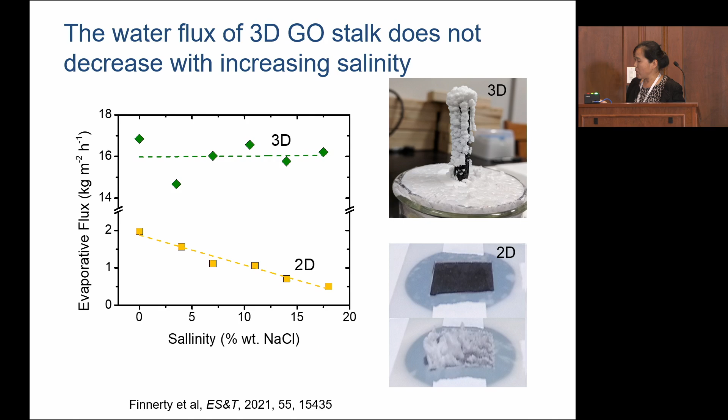So that brings the excitement about this work, meaning we could potentially use this process to evaporate water so much faster that we could shrink the surface area of an evaporation pond by taking advantage of all the benefits I mentioned earlier.

So the idea is that, for example, if we were to use solar evaporation to treat brine, we could potentially have a floating structure like this. Because of the high evaporation rate, we could have a much smaller area, and the smaller area would allow us to better engineer a water vapor collection process coupled with condensation for water production. At the same time, we could potentially collect the salt.

And that will allow for mineral recovery from this process.

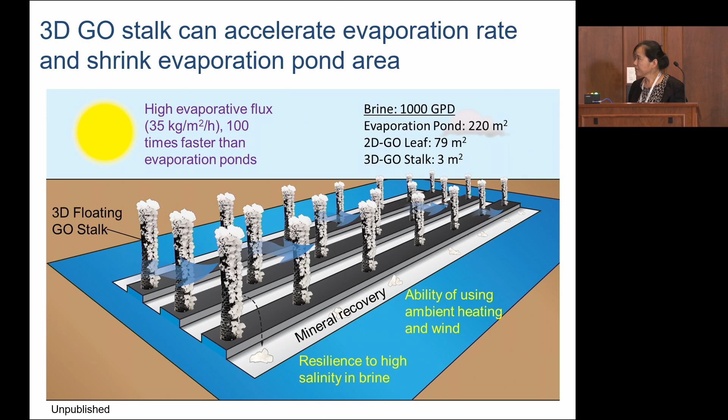However, my story doesn't stop here—I have to mention some challenges with this process as well. The data I presented earlier is just with sodium chloride, which is also the case in a lot of the literature on solar evaporation. Even when they claim resistance to scaling, that's the same phenomenon I presented earlier with sodium chloride salt. Rarely are there studies that really look into a mixture of salts and the effects of other ions on this process.

So Aydin, a new PhD student who joined a couple of years ago, picked up this work and started looking at the effects of divalent cations on this process. Here's what he found: with a pure solution of sodium and potassium chloride salts, the flux is pretty high. But once he used calcium chloride or magnesium chloride at the same concentration, you see a dramatic decrease in water flux. This was run on a scale of about 10 days or so.

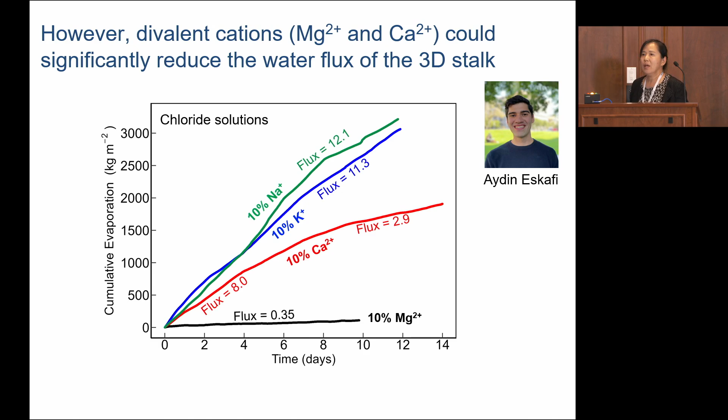That's really kind of discouraging, because in the brines we talk about, in most cases we have a lot of calcium and magnesium ions in it. So we try to understand what is happening here.

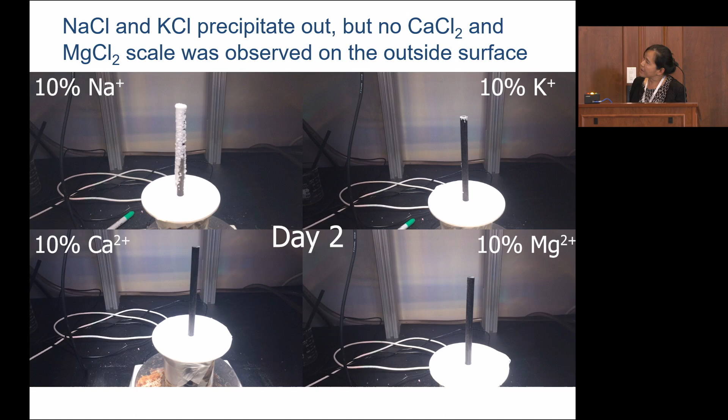This video shows the 10-day experiments, how you see the salt accumulating on the surface for sodium and potassium. You started seeing this crystal accumulation for sodium and potassium at the end of 10 days, but you don't really see anything at all for the calcium and magnesium concentration solutions.

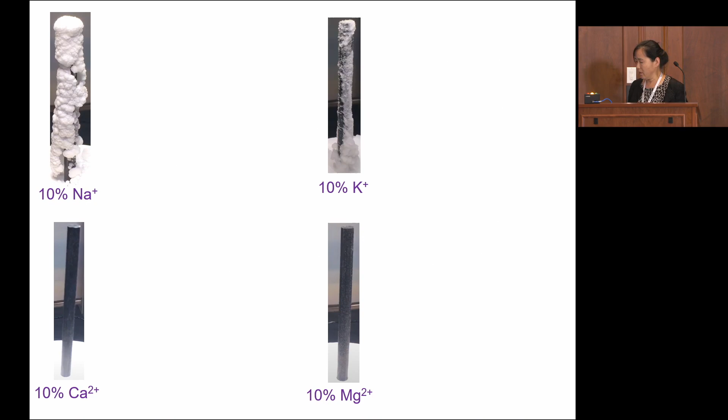This is the picture of the stalk at the end of the experiments. Again, for sodium and potassium you see a lot of salt accumulation, but for calcium and magnesium you don't see salt accumulation at all.

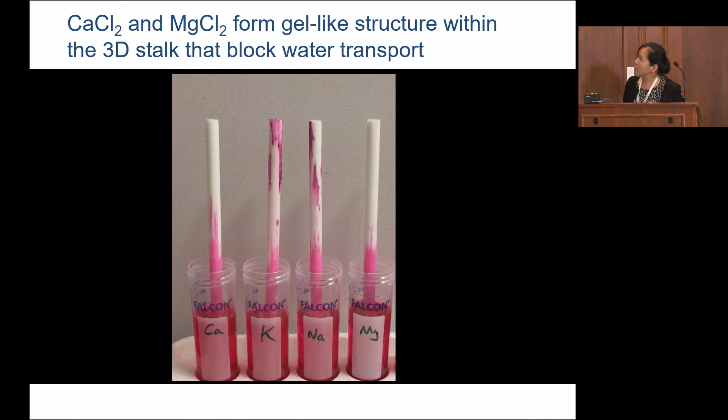Indeed, when we look at the water transport, even without evaporation at all, we use this dye to show how tall the solution can go. You can see in the middle, for sodium and potassium, the dye and water can really be lifted up to the top of the stalk. But for calcium and magnesium, it just stops there.

Of course, you can say, oh, you used very high concentration. Indeed, the 10% means 100,000 ppm - it's an extremely high concentration that we use in the experiments.

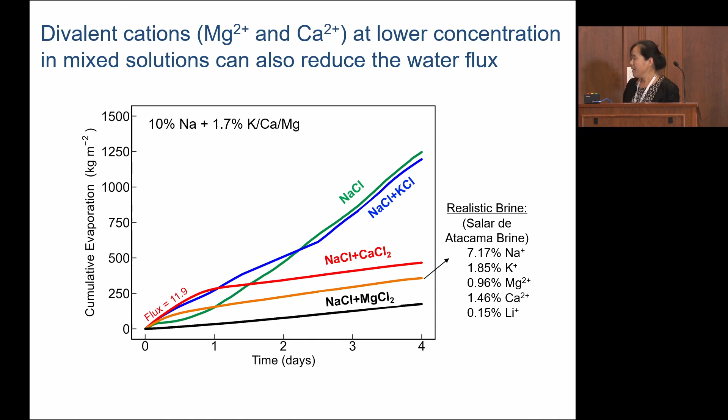But even with lower concentration, we tested a mixture of sodium chloride with a smaller concentration of calcium and magnesium, and we observed very similar effects. We also tested a realistic brine with a mixture of salts. This means these divalent cations could really affect the evaporation rate.

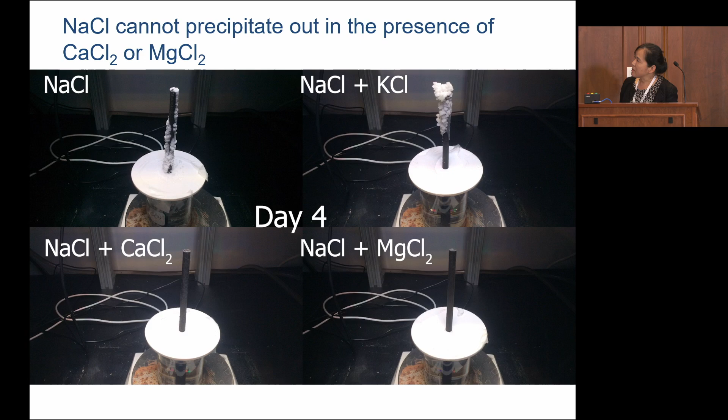Again, this video shows the accumulation of salt with the mixture. You can see with the presence of calcium and magnesium, even the sodium chloride cannot precipitate out anymore. So that's a very dramatic effect from these divalent ions.

You can see here, basically when we cut it open, we see these minerals within the stalk blocking all the water transport.

This doesn't really kill the technology yet. Even though I show a smaller evaporation rate, this is still a lot faster than natural water evaporation. But still, I think this is an issue that we have to address.

We have to be careful when looking at literature in this field to really pay attention to whether or not people have used realistic brine to test it out, because there are blocking effects you could potentially have. But this is also another kind of possibility.

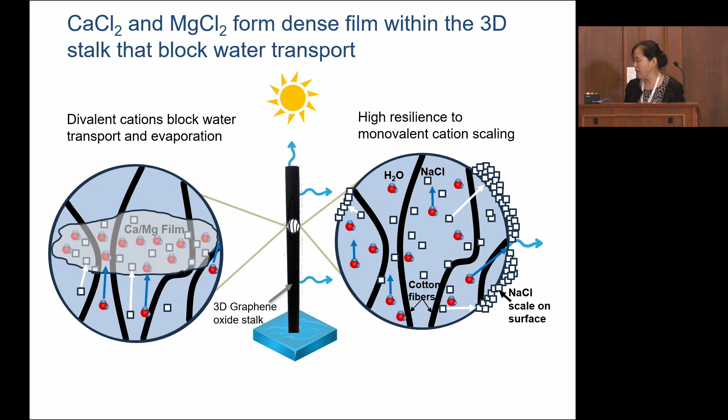I don't have much time, but it's a possibility to really engineer the material to achieve some interactions with the ions in the water. Potentially, if we could engineer the material to absorb lithium, we could keep all the lithium in the structure and evaporate the salt out. So it also shows some promise or potential to explore with these negative effects.

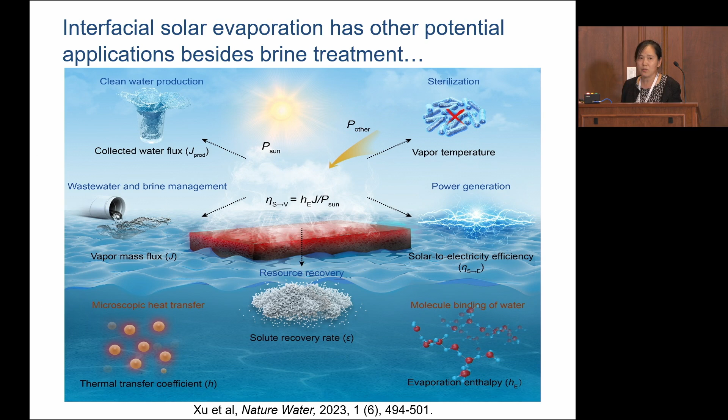I'll skip this. This is just a review paper put together by Professor Jia Zhu from Nanjing University. We co-authored this perspective showing how solar evaporation could potentially be used for different types of applications.

Finally, I want to summarize my talk by saying, hopefully I've shown that interfacial solar evaporation is a promising technology that could potentially be used to integrate water recovery and mineral recovery from brine, even though there's still a lot of work to be done, a lot of understanding to achieve before this technology can go into real application.

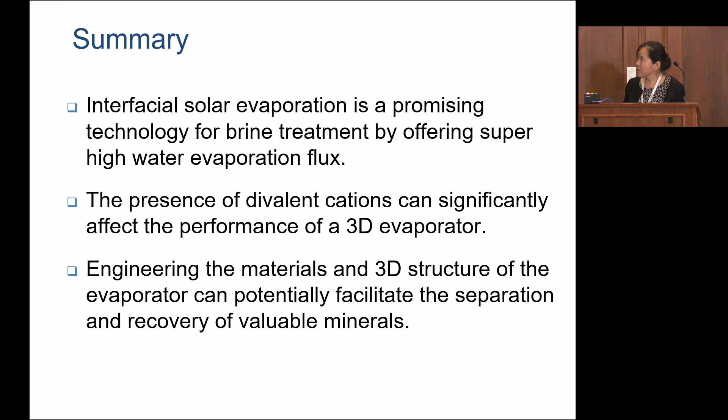Finally, I just want to thank the students. Dr. Casey Finnerty was the one who did most of the work - he's a professor at UC Davis now. Lin was the visiting student who's also a professor in China now. Currently, Aiden is the student who picked up on this project and is working on the divalent cation effects. I also have collaborators - Dr. David Sedlak was involved in some of the work, and Jeff Urban from Lawrence Berkeley Lab was involved in some of the work - and also some of the funding sources for this work. Thank you.